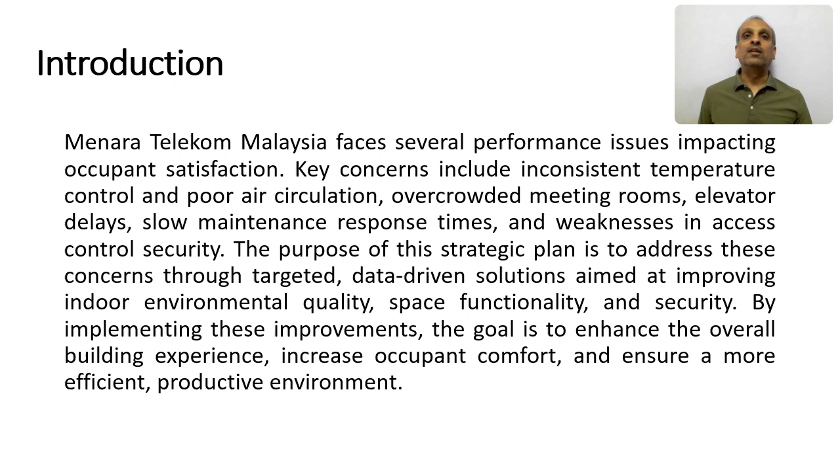Now let me explain objectives of the strategic plan. The strategic plan sets forth clear objectives aimed at enhancing building performance across several key areas. First, to improve indoor environmental quality.

The plan seeks to reduce temperature fluctuations by 30% and increase air quality satisfaction from 55 to 80%. In terms of space functionality, the plan aims to reduce elevator wait times from an average of 3.5 minutes to 1.5 minutes and introduce a new booking system for optimizing the meeting room availability.

Finally, with a focus on security and maintenance, the plan will reduce maintenance response times from 48 hours to 24 hours and implement stricter visitor access controls to improve safety and efficiency.

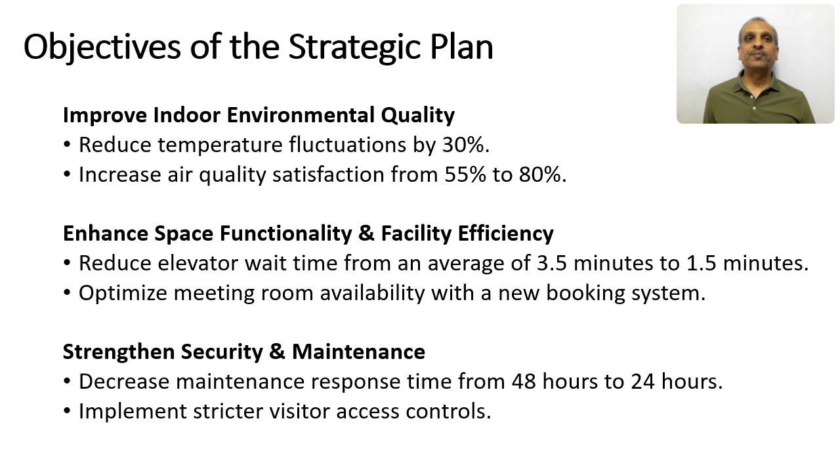Now, let us understand issues related to building performance. Menara Telekom Malaysia faces several performance challenges that are detracting from and impacting overall occupant satisfaction. Among these, poor air circulation, inconsistent temperature control, and noise disturbances are significant barriers to comfort and productivity.

Lighting issues are causing eye strains for occupants, while overcrowded workspaces and a shortage of meeting rooms are reducing their overall efficiency. Elevator delays and restroom maintenance problems further frustrate the occupants, compounding their dissatisfaction.

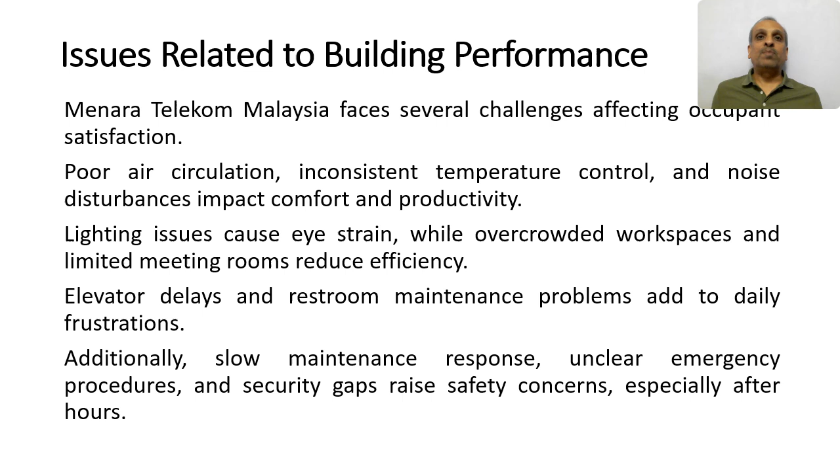Additionally, slow maintenance responses and unclear emergency procedures for routing exits and security lapses are present, which are causing safety concerns, especially after working hours.

Now let me explain data collection and its analysis. First is our methodology. To identify and address issues explained in the previous slide related to building issues, the study used post-occupancy evaluation approach, collecting data via electronic survey questionnaire which was distributed to building occupants at Menara Telekom Malaysia.

A total of 30 respondents, including employees, contractors, and visitors, provided valuable feedback on indoor environmental quality, space functionality, maintenance, and security, as the questionnaires were designed to address these issues. The collected data was then analyzed to identify key trends and pinpoint areas requiring improvement to enhance the overall building experience and occupants' satisfaction.

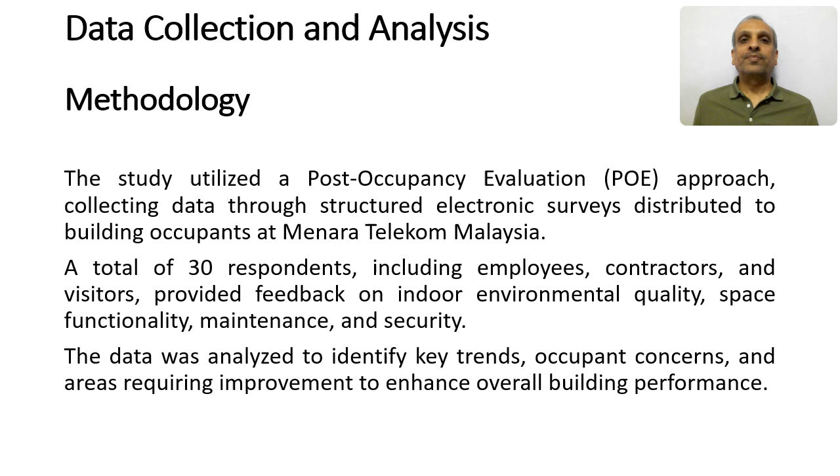Now, let us deep dive into our data analysis part. First, indoor environmental quality analysis. Indoor environmental quality plays a crucial role in workplace comfort and productivity. Our analysis focused on four key aspects: temperature control, air quality, noise disturbance, and lighting.

Now let me explain these graphs. The X-axis shows the rating scale corresponding to our questionnaire, where 1 denotes least satisfied and 5 denotes the most satisfied response. The Y-axis shows the percentage of responses for each rating.

Now let me explain, starting with the temperature control ratings. For temperature control, the graph is here. 50% of the respondents were satisfied, while 23% expressed dissatisfaction, primarily due to the inconsistent cooling across different areas. So 50% almost satisfied, but the others were not satisfied.

Air quality rating. Now we move on to air quality. The graph is here. A total of 53.33% rated air quality as good, but 16.66% found it poor. They cited inadequate ventilation in enclosed spaces as the reason.

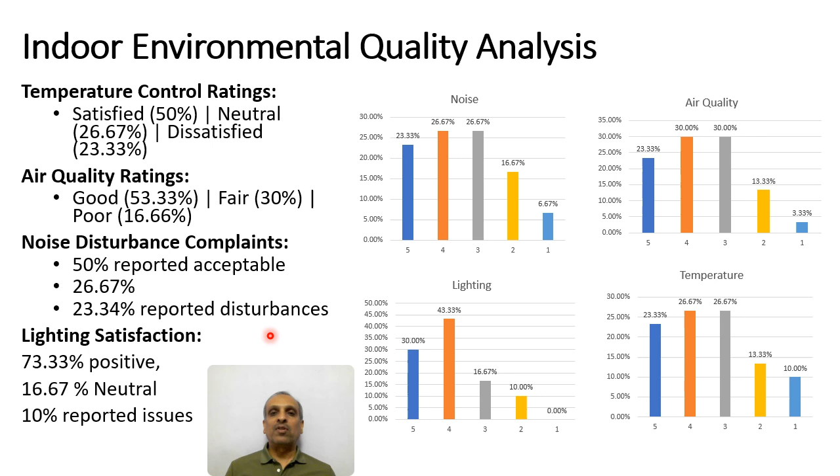73.33% were satisfied. However, 10% were dissatisfied and reported glare and insufficient brightness in certain areas. Addressing this concern will improve overall employee well-being.

Now let us analyze space functionality and facility efficiency with the help of the graphs. The layout and functionality of office spaces directly impact daily operations, and we cited several areas that need attention. First we start with the workspace layout.

52.94% of respondents were satisfied, while 29.41% reported discomfort due to overcrowding and inefficient desk arrangement. The graph for workspace layout shows 52.94% satisfied, and responses 1 and 2 total 29.41% reporting discomfort, with the major issue being overcrowding and inefficient desk arrangement.

Second point is meeting room availability. The graph shows a total of 46.67% of respondents were satisfied. But 30%, which is number 1 and number 2, face difficulties booking meeting spaces, leading to scheduling inefficiencies.

The next point is elevator efficiency. The graph shows 40% satisfied and 30% dissatisfied due to long wait times, especially during peak hours.

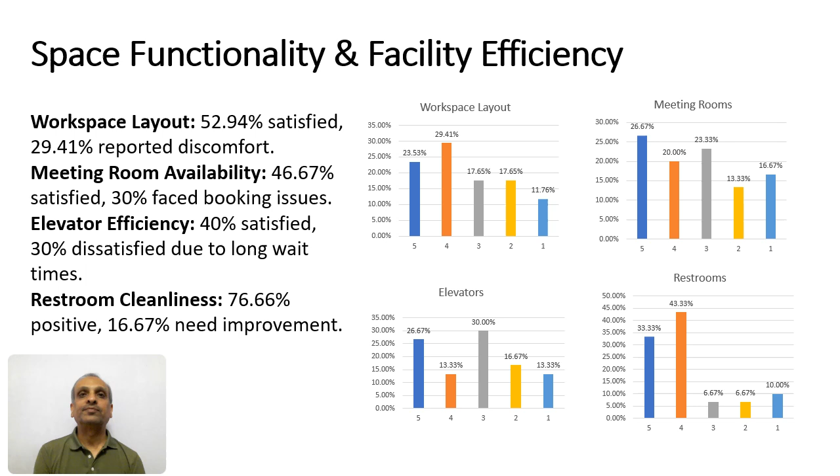Now let us analyze an important part, which is building maintenance efficiency. First is maintenance services. Efficient maintenance services are essential for a well-functioning office environment. This survey results revealed as follows.

Related to maintenance services, 60% of the respondents were satisfied, but 16.66% expressed dissatisfaction and concern over slow response times and inconsistent maintenance schedules. They also highlighted specific areas requiring more frequent attention.

This graph explains the response, where numbers 5 and 4 total 60% of respondents rating maintenance as satisfactory, whereas 16.66% expressed dissatisfaction. Moving on to the next topic, which is emergency exits.

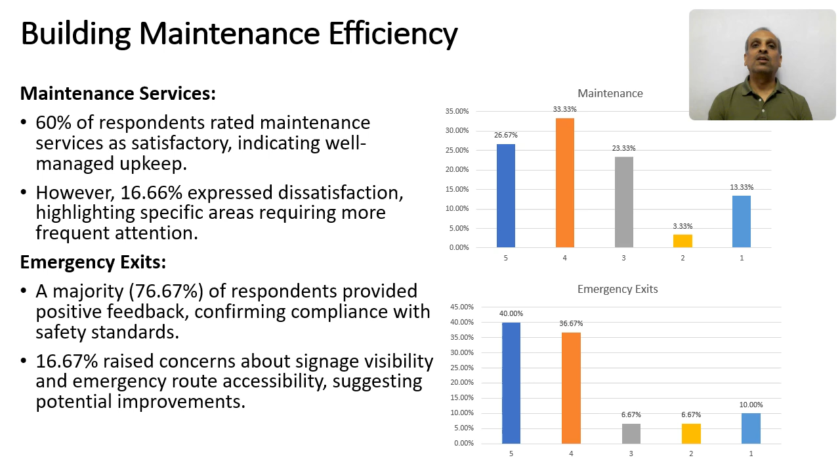While the majority, 76.67%, acknowledge compliance with safety standards, 16.67% raised concerns about unclear signage and emergency exit route accessibility, which is quite important in emergency cases. To enhance maintenance efficiency, we recommend a digitalized request tracking system and regular inspections to address facility issues promptly.

Now let us analyze an important topic, security measures. A secure workplace ensures the safety of employees and visitors, which is a quite important aspect. Let me explain our findings related to security systems and access control.

Negative feedback primarily came from contractors and visitors, indicating a need for more streamlined security protocols. Enhancing security measures through stricter access control policies and an improved visitor management system will certainly strengthen workplace safety.

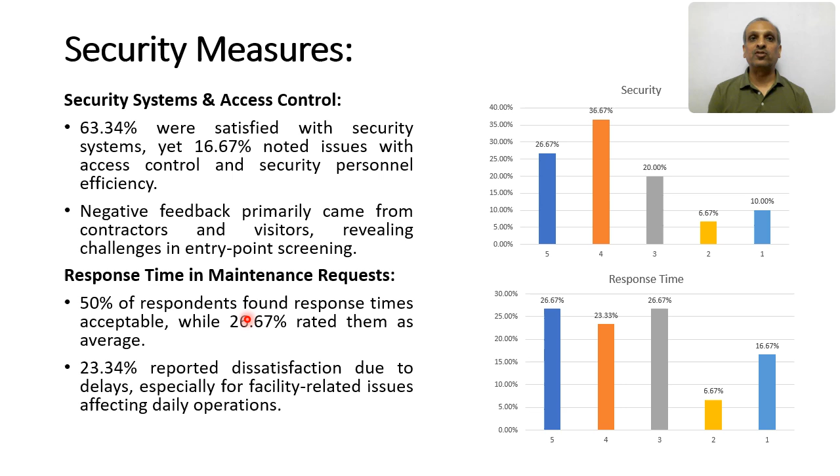Now let us decipher our solutions. First, strategic solutions overview. To address these issues and enhance building performance, we propose a set of targeted solutions across three main areas: first is indoor environmental quality, second is space functionality, and third is security and maintenance.

These solutions are focused on leveraging data-driven improvements, optimizing operational efficiency, and improving the overall occupant experience. Our goal is to create a more comfortable, productive, and secure environment for all building occupants.

Now let us understand our proposed solution for improving indoor environmental quality. One of the primary issues identified is inconsistent temperature control and poor air circulation.

To address this, we recommend upgrading the HVAC system to provide better temperature regulation and airflow, including a real-time temperature monitoring system and airflow optimization by increasing air changes per hour as part of the upgrade.

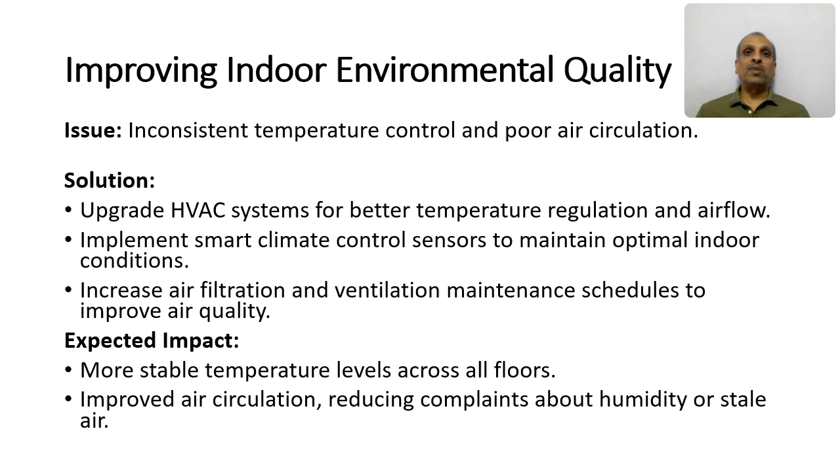The upgrades are expected to result in more stable temperature levels across the building, for which we also suggest HVAC zoning. All these measures will provide more stable temperature levels, better air circulation, and reduce complaints related to temperature control and stale air.

Now let me explain solutions for optimizing space functionality. The key challenge identified was overcrowded meeting rooms and elevator delays. As a solution, we propose introducing an online room booking system to optimize meeting room usage, as well as redesigning shared spaces to improve accessibility and seating arrangements.

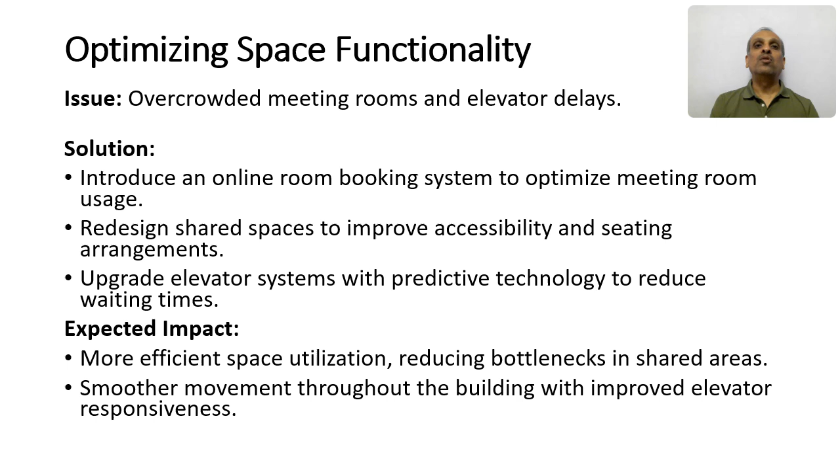Upgrading elevator systems with predictive technology will also help reduce waiting times and ensure smooth movement throughout the building. These changes will lead to better space utilization, fewer bottlenecks, and improved overall flow within the building for its occupants.

Next, let us look at our solution proposal for enhancing maintenance efficiency. Here, the key issue was slow response times for maintenance requests.

As a solution to address this, we suggest implementing a digital maintenance request system that will allow real-time tracking of requests and issues. We will also increase staff training to improve troubleshooting speed and efficiency.

Staff training is quite crucial, and improving this will certainly help in reducing troubleshooting time. Additionally, conducting routine inspections, which is quite important, will help address minor issues before they escalate into more significant problems.

These measures will result in faster maintenance response times, reducing disruptions to daily operations, and ensuring a more proactive approach to facility management.

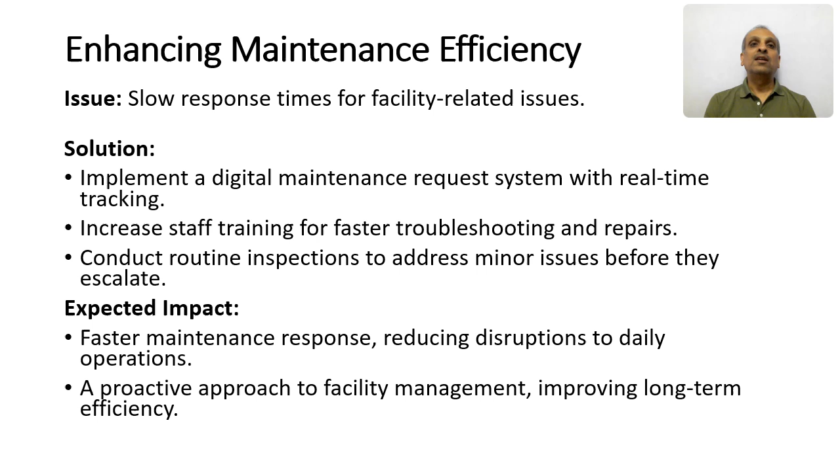Now let us understand solutions for strengthening security measures, which is also one of the key aspects. Security weaknesses, particularly in areas of access control and visitor management, were identified as areas needing attention.

To enhance security, we propose introducing a biometric access system for employees and a pre-registration process for visitors to streamline their entry. Additionally, improving security staff training will enhance screening and response protocols related to their inefficiencies.

The installation of additional CCTV cameras in key areas will further improve surveillance, ensuring better overall security and reducing risks related to unauthorized access.

Now let us address the very important topic, often neglected, of emergency preparedness. Especially in the case of a building such as Menara Telekom Malaysia, a high-rise building, this issue becomes crucial. Concerns regarding emergency exit accessibility and signage visibility were raised by some respondents, which was a key issue.

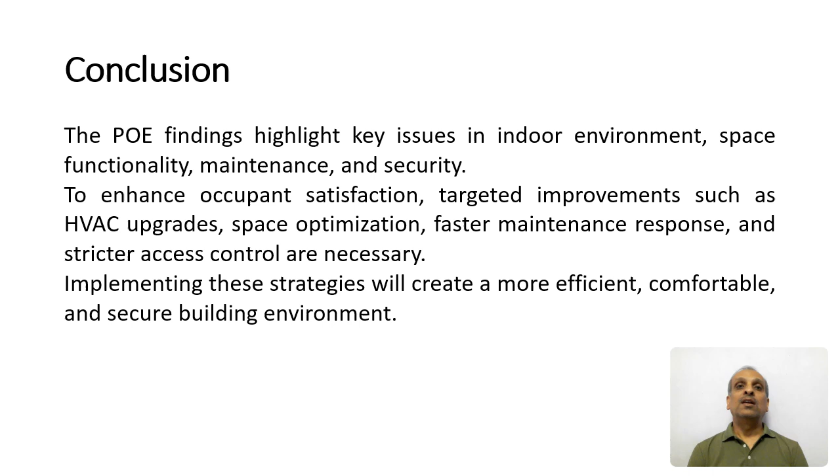To improve occupant satisfaction and building performance, targeted improvements such as HVAC upgrades, space optimization, faster maintenance response, and enhanced security measures are essential. By implementing these strategies, Menara Telekom Malaysia will be able to provide a more efficient, comfortable, and secure environment for all its occupants, ultimately leading to higher satisfaction and improved productivity.